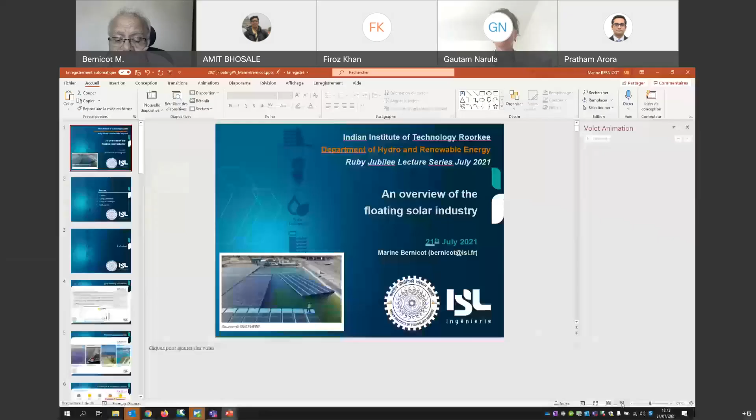So I am Marine Bernicot from France. I come from ISL Ingenierie, which is a French engineering firm which is about 35 years old. It was created originally by three experts coming from the dam and hydropower sector. You will notice from my presentation that our background is really dam and hydropower. We also work on any topics related to water and water resource management. So that's how we came to floating solar. And I am myself very much involved in seeing how we can have hydropower and dams work together with floating solar.

We are about 120 people based mostly in France, in 5 offices, and we work about half on French projects and half on foreign projects. Africa is one of our most active parts of the world abroad, but we also come sometimes to India, sometimes to Southeast Asia. It really depends on the projects. I think that's enough for my company.

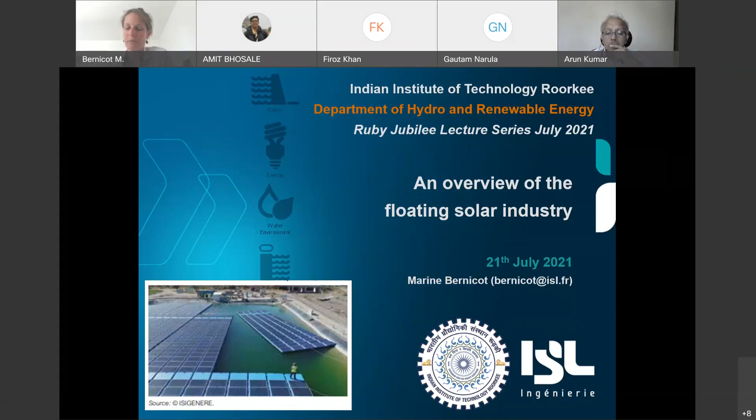Let's go directly towards the topic of today. So I'll try to provide you a brief overview of the floating solar industry, separated in 4 different topics: a bit of context and figures about the floating PV industry, then energy generation, design of floating PV and challenges encountered, and environmental and social aspects.

I'm just checking before going very fast into my presentation. Is it moving smoothly? We can see. We can hear you well. Okay, perfect. So I continue.

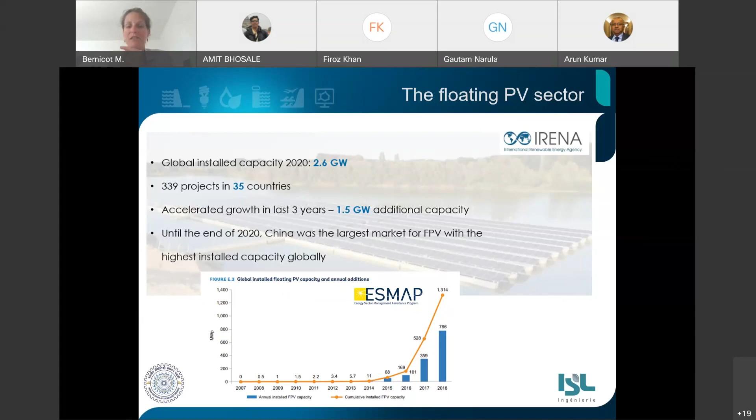Unfortunately, it only goes up to 2018, but you can see how fast the figures are growing, and the growth speed is still the same, even increasing now. Until the end of 2020, China was definitely the largest market for floating PV, with the highest installed capacity. A few examples of recent projects. Of course, there are many more, but I wanted to take some specific examples.

The first one is a 181 megawatt floating PV project located on the west coast of Taiwan. It's changing so fast, but I think it's the world's largest floating PV plant at the moment. It was commissioned in 2021, developed by China Energy.

It's very interesting to note that this project has been developed in a super densely populated area. The second project is located in China, in Anhui province. It was commissioned in 2019. It was the previous largest one, and it's operated by the Three Gorges Group, the company that also operates the Three Gorges Dam, hydropower dam.

The third project presented here is a project in the Netherlands, one of the countries in Europe developing the most floating PV at the moment. It was commissioned in 2020. The interesting thing about this project is that they really made a specific effort on monitoring and mitigating the environmental and social impacts by installing elevated modules to allow air circulation at the surface of the water, using glass solar panels to ensure the light still reaches the water,

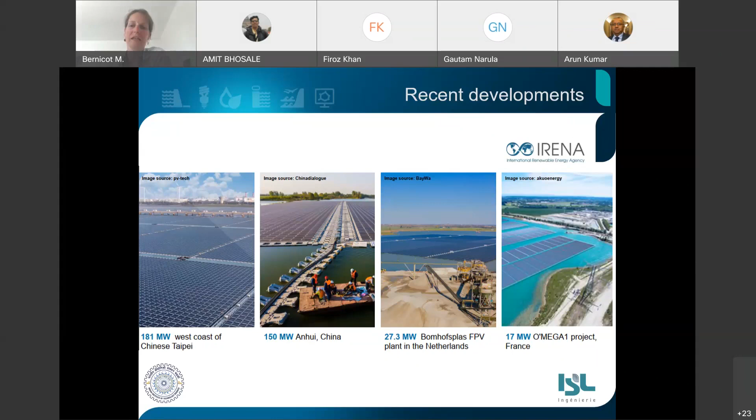Brief view of what's to come in the next 3 years. Many projects are in the pipes, about 150 megawatts in Indonesia. That project is one identified project on Cirata Dam. It's a dam reservoir developed by Masdar. About a gigawatt of projects in China, about a gigawatt of projects in India too.

I'm not going to go through India too much because I think Mr. Kumar will give a better view of what's happening in India at the moment on the floating PV sector. But yes, India is becoming a big player in this industry. South Korea is also having big ambitions in developing floating PV with 2 gigawatts planned in the next 3 years.

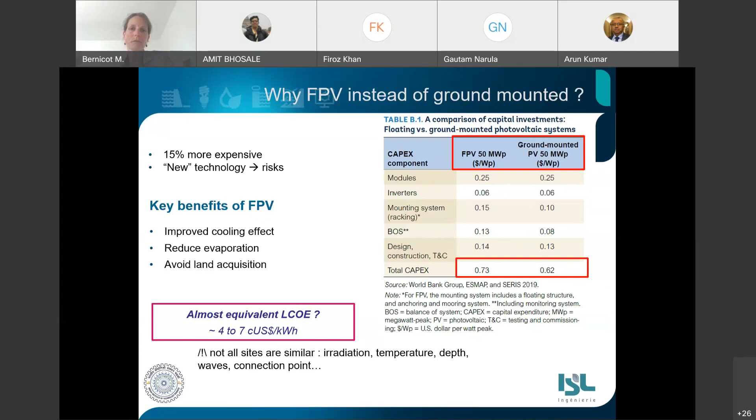About energy yield, I wanted to emphasize two examples showing comparisons that have been done on two different projects. The first one I wanted to talk about is Alto Rabagão in Portugal. This experimentation was conducted by EDP, the national energy producer. So it's a pilot project, 220 kilowatts, that was commissioned in 2016. And they compared the production of electricity between the floating plant on the lake and a PV plant on the rim next to the dam.

And what they observed is an efficiency gain of approximately 5%. They said that maybe it might be a bit less because measurement was from really high irradiance, winter, and unexpected temperature. But still, they observed that increase of 5% in the energy yield.

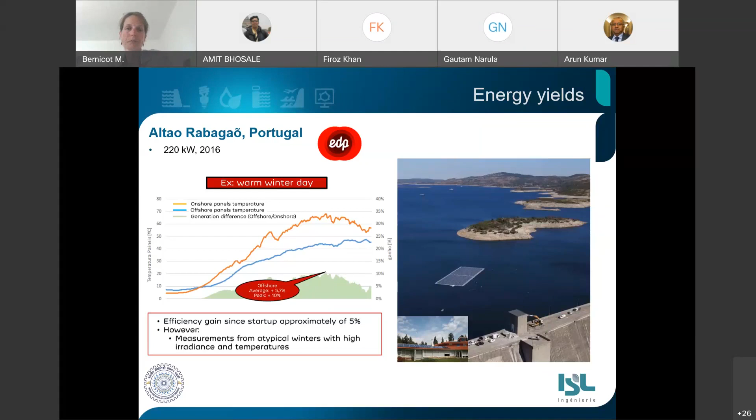The second example I wanted to talk about is not precisely a comparison between floating and terrestrial PV, but it's also an experimentation that has been conducted in Switzerland on Lac des Toules, which is an area really in the high mountains, and we would not really expect good results for PV projects. But I wanted to present it to you because I think in India you might also have this kind of location with a lot of snow and ice, and it could be interesting to know the technology.

So they compared here monofacial traditional panels with bifacial alpine panels, and they found out that with bifacial panels, thanks to the reflection of the light on the snow and in the area with the water and everything, they could increase by about 50% the yield and the energy production of the PV plant in the mountain compared to a traditional power plant in the plain.

The production they obtain in that power plant that is high in the mountain in the middle of the snowy area is equivalent to the one of a PV plant in North Algeria, in Africa, with a lot of sun. So it's quite impressive and really interesting to consider for PV in a mountainous area.

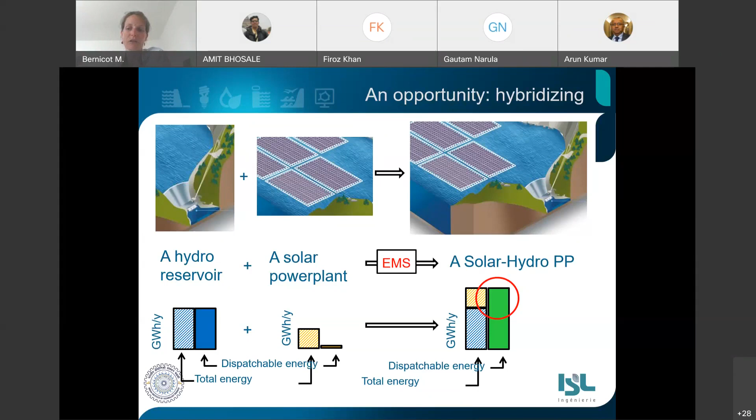The objective of hybridization is to take advantage of the storage capacity offered by the reservoir in order to transform this fatal PV production into a more dispatchable energy, and then help the integration of this new PV, which can be floating, into the grid. Several levels of hybridization are possible, from simple collocation to complete hybridized solar hydro, acting as a unique 100% dispatchable power plant. The complementarity can be on many time scales.

The minute one: a cloud is passing by, solar power is quickly dropping, creating instabilities on the grid, and hydro can, under certain conditions, locally compensate the drop by modulating the turbine flow. It should be done carefully, though, to cope with the turbine characteristics and avoid quick flow variation downstream.

The second one is the daily scale, to have the daily solar power curve match the daily electrical load curve. During daytime, the sun is up, turbines are functioning at minimum, allowing to store water, and then this water can be turbinated at night at peak hours. So you can shift water from day to night.

And the last time scale is the seasonal scale, where in many countries you have two very different seasons: a rainy one with less sun but with a lot of water filling up reservoirs, with a lot of hydro production, and then a dry season with a lot of sun but less and less hydro as the water levels are decreasing in the reservoirs.

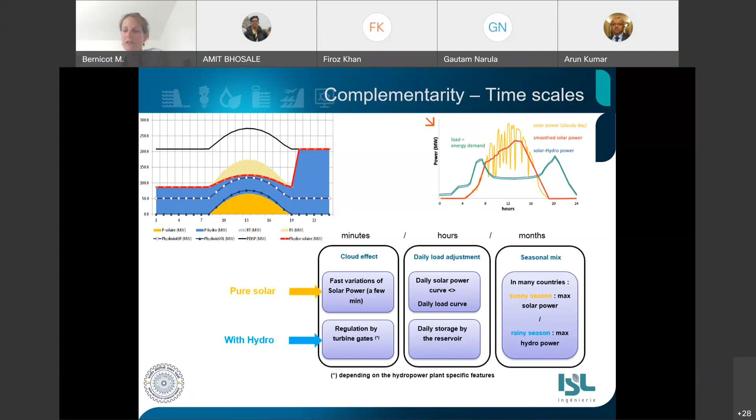Some interesting benefits can be obtained from this complementarity between solar and hydro. The first one is to increase the firm capacity by displacing water from daytime to peak time, that is most of the time at night, at evening time, let's say. The second one is to save water that you can replace by solar. And that water, in areas prone to water scarcity, can be used for other purposes such as irrigation, thus helping mitigate conflict around water, for example.

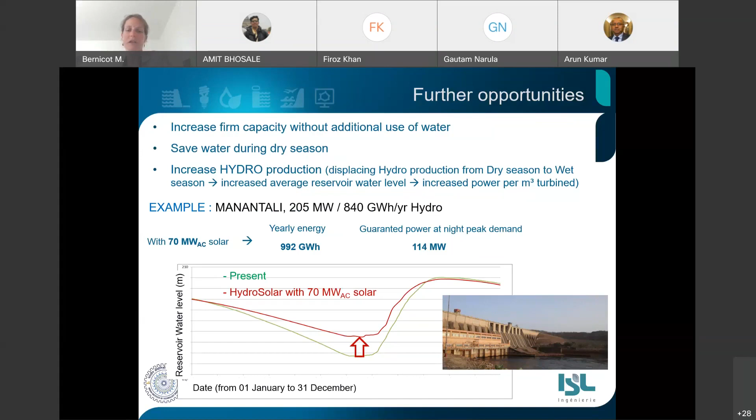And the third one is an induced benefit. By saving water, the average level is increased in the reservoir, increasing the head, thus the hydropower production. On the Manantali example in Mali, we managed to show that by optimizing the reservoir management curve, thanks to hybridization, they could produce up to 5% more hydropower with the same amount of water available. So that's quite a lot, actually.

So that concept of hybridization is attractive: increase of PV penetration on the grid, firm capacity, water saving, mutualization of electrical equipment, storage solution. But it also brings constraints, and it's not that easy, as always. You can have quick variation of downstream flow and associated environmental and social impacts, and hydro equipment fatigue because of repetitive stop and go.

It can also compete with other existing uses of the reservoir if not managed properly, or lead to loss of power by spilling over. It complexifies the operation, with a high level of communication required between hydro and PV. The right balance is not easy to find; probably that's why we don't see so many hybridized projects so far. But we start seeing first projects being implemented in Albania, in Europe, in China, and in Portugal on the Alqueva power plant.

Let's go to design and challenges. A short insight first of design choices and design technologies that exist for floating PV. The first one is the bank anchoring. So basically, you can have different types of anchors for different types of floating PV situation, different types of reservoir and everything. So the first one is you can anchor your floating PV on the bank. You have an example at the lower part of the image.

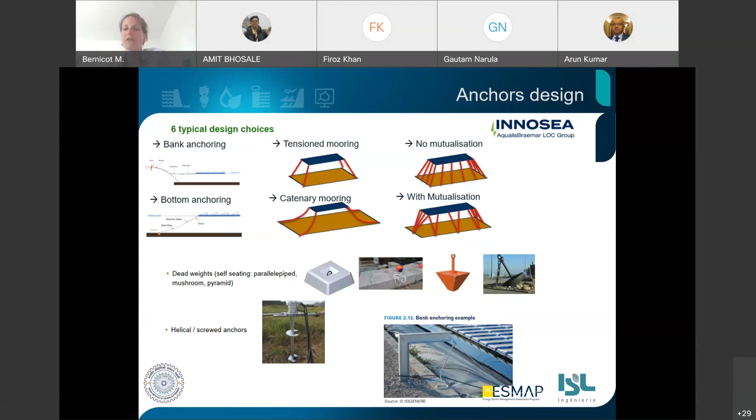And then you can mutualize those anchors in some specific points, or have many different anchors located one close to one other one. This mutualization depends on geotechnical conditions, of course, and also the type of floaters. And you will see that there's not only one type of floaters. Different floaters exist. We can basically sort them in three families.

The first one is individual floaters. I think the most famous one now is the one supplied by Ciel&Terre. So basically, each PV panel is located on its own floater, and then each floater is connected to the next one through connecting pin. Second family is what we call pontoonists.

So basically, on those technologies, the floating PV panels are located on a rigid, or at least a common structure that will handle the efforts coming from the anchors. So each panel is not set on an individual floater. The floater is carrying the whole structure in one block. And then we have a third family that is a bit in between, where you have floaters crossing each PV panel, and sharing efforts between each panel.

You have also some typical examples. This example down at the left bottom of the presentation is a floating PV plant that is rotating to follow the sun around a central pile. And that one is an example of the OceanSun technology, where the PV panels lay down on a whole structure that is floating on the reservoir.

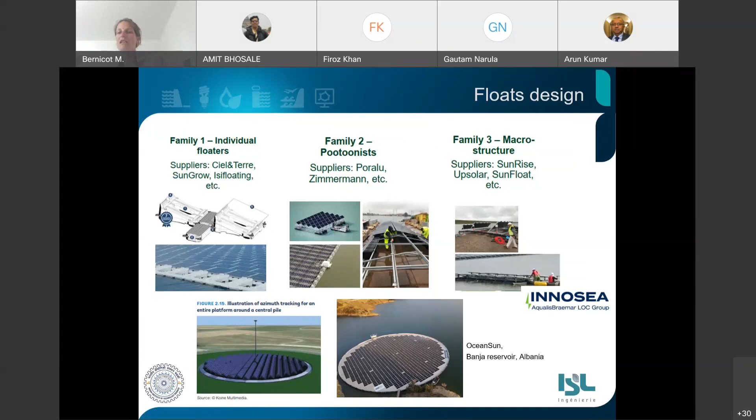So as you can see, there are many different technologies of floaters, and for each float technology, you will have a specific anchor design that needs to be designed together with the float technology, because you will not have the same anchors if you use the individual floaters technology, where the efforts need to go through every connecting pin, or if you need to connect and to anchor the whole pontoon of this family of floaters. So really the whole floats, anchors and mooring systems have to be designed together according to each site specification.

So those site specifications, what are they? They depend on soil conditions, the size of the area, the admissible loads on floaters, wind, water level variation, etc. Many data should be taken into account to propose the proper combination of floaters and mooring design and anchors.

I just want to give a small insight of additional challenges that are brought by floating PV on dam reservoirs, because you have specific topography around the reservoir, with most of the time a specific channel for the wind, which will increase the wind velocity and make it difficult to compute and to measure. You can also have higher waves because of the larger reservoir, and also stronger waves that will accelerate the fatigue on the floating PV structures.

Anchoring can also be more challenging because of deeper reservoirs and less known bathymetric and geotechnical conditions, and also because of higher water level variation in the reservoir that can imply specific design to be able to keep the tension in the cable and prevent the structure from drifting.

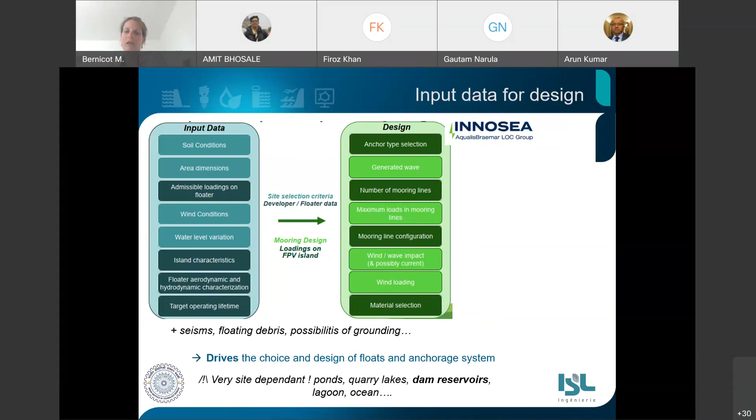So basically, floating PV are subject to some specific main loads: wind that applies directly on the PV panel, waves that will apply on the floating structures, and current that will also apply on the floating structures. Current, most of the time, is negligible, and so most of the efforts and the main loads will come from wind and waves. Waves are generated by wind, so basically the wind is the most important load that will apply on your floating PV system.

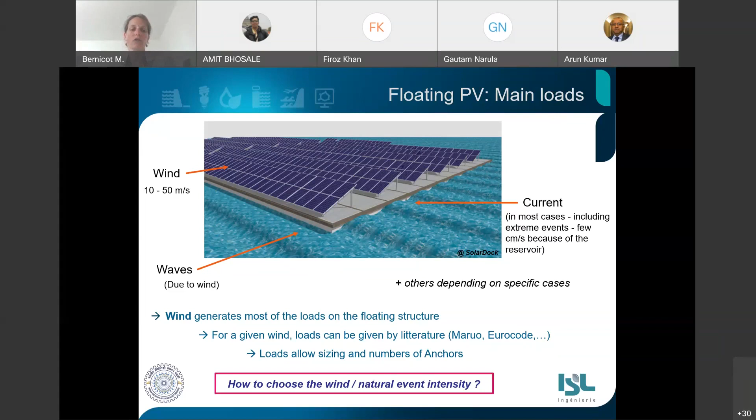For given wind, you can compute the loads that will be applied to the floating PV panels thanks to literature. But then how to choose the wind or another natural event that will create load on the structure, how to choose this intensity? You need to think about it from a risk analysis perspective.

In the case of floating PV on any water body with no dam, in case of failure, what happens? I only lose my investment. Electricity generation will stop, but it remains an investor risk over the lifetime of the floating PV plant. Typically, they will accept a probability of 10-2 and consider events with a return period of 50 to 100 years.

Second case, we are on a dam reservoir, and it's a bit different because in case of anchor or structure failure, you will also lose your production, but if the floating structure goes away, you can have obstruction of the spillway or create other damage on the dam that could eventually trigger the main safety barriers of the dam, potentially leading to dam failure.

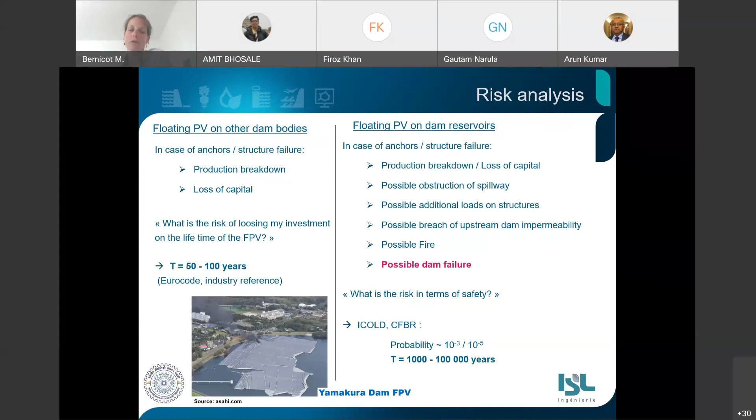In that case, the consequences of failure are completely different and much bigger. Dam safety standards impose protection against events with a return period of 1,000 to 100,000 years, depending on type and size of dam. So you see that we are not really on the same scale. Floating PV developers so far are not well aware of that difference, and they tend to consider dam reservoirs similar to any other water bodies, even though there is a difference in terms of consequences.

So what you must be careful of when you do floating PV on a dam reservoir is to meet the required safety criteria. You have two options for that. The first one is to reduce the floating PV failure probability. Option 2 is to disconnect floating PV safety requirements from dam safety requirements, and that's probably the wiser thing to do: add safety barriers in case the floating PV fails, to protect your dam and your spillway from any obstruction.

In the world, there's no formal regulation so far on this specific subject of floating PV and dam reservoirs. The best option will probably be, as always, a smart combination of everything, meaning reducing the floating PV failure probability, disconnecting floating PV safety requirements from dam safety requirements, and protecting your dam. That's the most important.

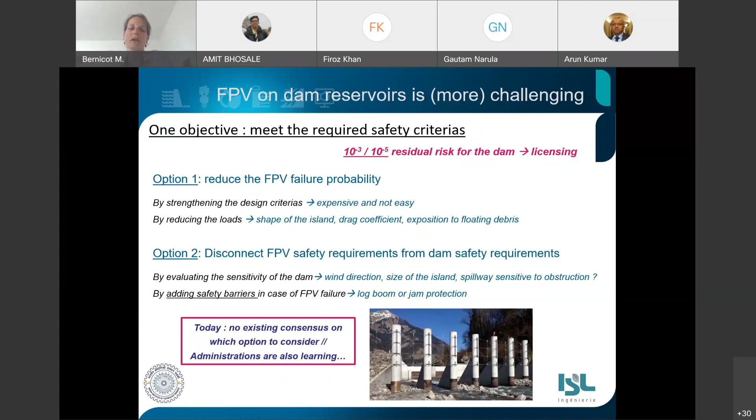Last point, environmental and social aspects. Three different topics will be discussed here. The first one is the physical environment, second is biological environment, and third is social environment. The first quite important impact expected from floating PV installed on a water body is that by installing the panels, you create a barrier so sun and wind cannot access the surface of the water as they used to in the initial configuration. That has an impact on stratification and water quality.

This graphic really synthesizes everything. Basically, your layer of oxygenation and the mixed layer depth become shallower, and the water temperature decreases below the floating PV as less light and less sun reach the water.

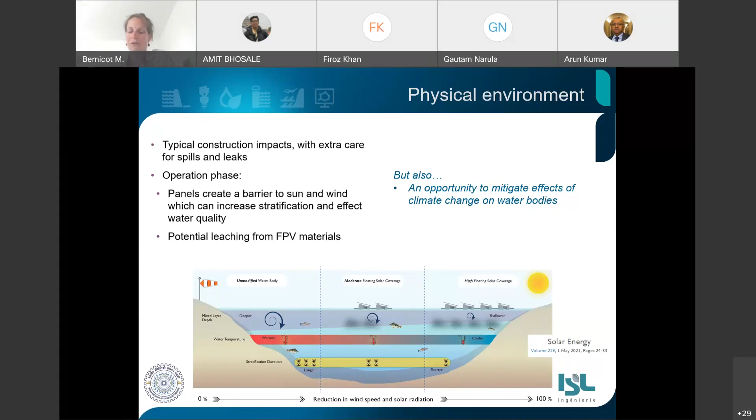This can be a negative impact, but in some configurations it can also be seen as an opportunity to mitigate the effects of climate change on water bodies, where with increased temperature you also increase the water temperature, which can have negative effects on the physical environment. So it's a balance. Floating PV panels can have a negative impact on water bodies, but they could also be used as an opportunity to mitigate those effects of increased temperature brought by climate change.

Second impacts are biological. The first ones are directly linked to that modification of the physical environment. When you have more shading, you have fewer plants at the bottom of the reservoir and more algae that will grow, so it will modify your environment. Water quality change, such as the thermal structure, can also impact biology, such as vegetal and animal species in the reservoir.

Another impact that is most of the time a good impact of floating PV on reservoirs is reduced evaporation, by reducing the action of sun plus wind on the reservoir. It reduces evaporation and saves water. In some situations, when a wide area of the reservoir is covered by floating PV, it can help reduce wind and current at the surface, thus reducing bank erosion and giving more space to local species and vegetation to grow and be less harmed by waves, for example. So this can be a benefit from PV panels.

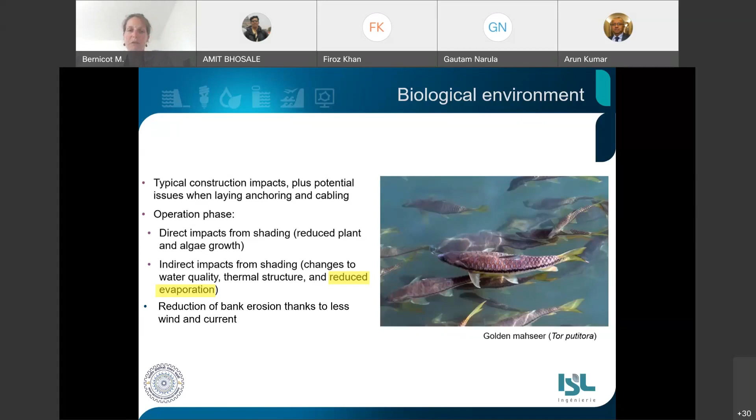Third impact is the social impacts.

Those are typical impacts that you can expect. When you install floating PV on a reservoir, you reduce the water navigation area, and you increase the risk of any elements, boat or anything, having a collision with your floating PV panel. You will change the visual appearance of the landscape. You will reduce the access to water bodies for fishing.

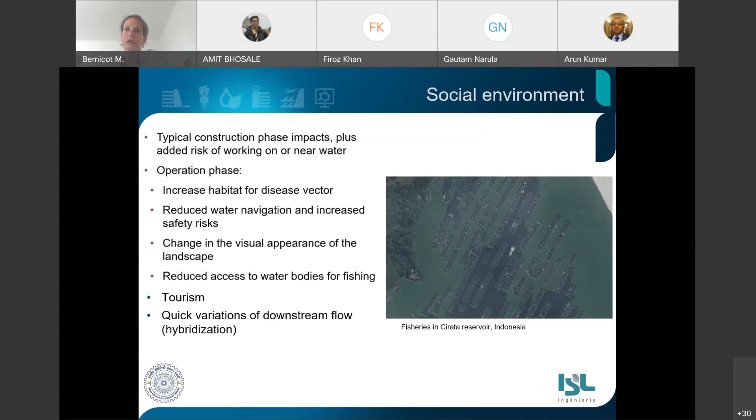The photo that I've put on the right part of the slide is an example of Cirata Reservoir in Indonesia, where they want to install 145 megawatts of floating PV. This reservoir is already used a lot for fishing, so this is a social impact that should not be neglected. You will have impact on tourism, and in the case of hybridization, you can also have quick variation of released downstream flow, downstream of the reservoir of the hydropower plant.

Those ones are quite positive impacts. Floating PV does not require any additional land. You use land that is not usable for any other purposes, so it reduces land use pressure. And we start seeing this already. The countries that are going the fastest towards floating are countries with a high density of population, and they need new space, and they cannot install ground-mounted PV because it will compete with other uses for the land.

It has low CO2 and greenhouse gas emissions, and when combined with hydro, through hybridization, it enhances those gains, meaning that for the same use of land, you will produce more energy than hydropower alone or PV alone. You will combine both hydro and PV on the same land use. So you decrease the global footprint when you relate it to the occupied surface, and it's the same with the greenhouse gas emissions. You will decrease it per kilowatt, related to the energy generation, because you make better use of the same amount of land.

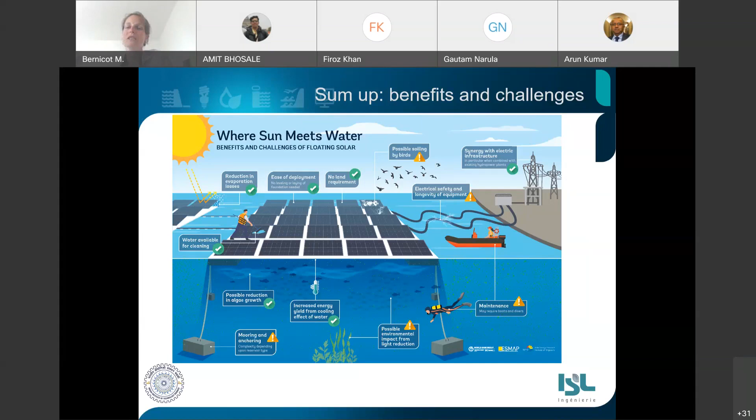I'm not going to take too long commenting on that image, but I thought it was important to put it back here. It's a really good summary that was prepared by ESMAP and SERIS in their overview of the floating PV industry. It summarizes everything that I've talked about until now: evaporation reduction, land requirements, challenges for technical design, increased energy from water cooling effects, impact on algae growth, and so on. It's a good synthesis, and it's good if you can have it with you if you are asking yourself questions about floating PV.

I'm done with the presentation. I just wanted to give you some very useful references if you want to dig into the subject. Those two documents, ESMAP, Where Sun Meets Water, prepared by SERIS and the World Bank, are very enlightening regarding the floating PV industry. One book published by Elsevier called Floating PV Plants collects many experiments and data that were conducted on floating PV. It's really interesting. The recommended practice written by DNV regarding floating PV anchor design, and some other articles.

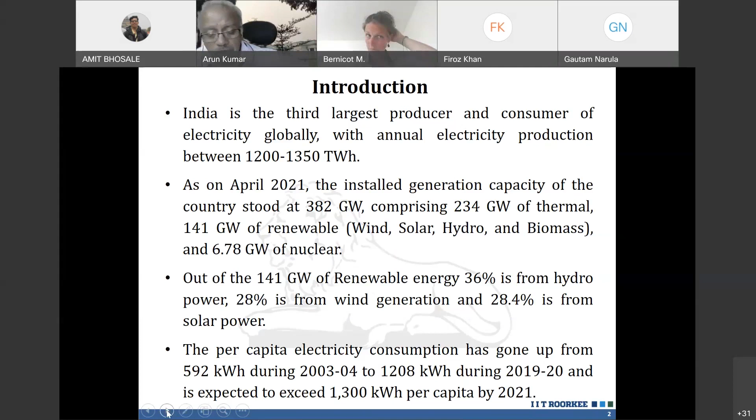India is the third largest producer and consumer of electricity globally, with annual production of say 1,200 to 1,350 terawatt-hours. We have about 382 gigawatt, where the majority still is thermal, and about 141 renewable, and out of that something about 36% is from hydro, and this 28% is growing quite rapidly. Expectations are going very high. Consumption is also rising by 6%. And the Indian commitment of transition from normal power to RE is going in a big way.

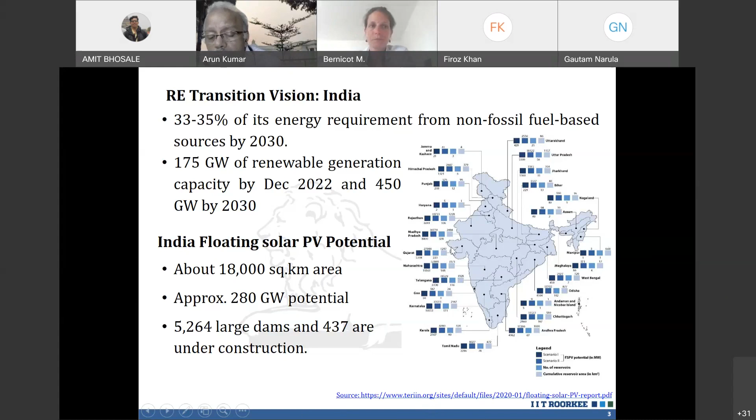So we have about 18,000 square kilometers of area and about 280 gigawatt potential. If you look at the map prepared under a study by TERI, the World Bank and others, you can see many states have a large potential for floating solar. They have also studied the variation during different seasons, because Indian water is quite non-uniform. We get rains during 2 months or 40 days, and we use it 365 days.

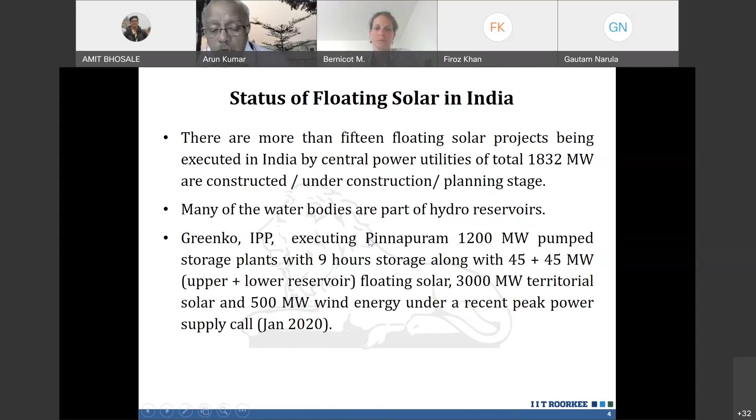So there are about 15 floating solar projects which have been already executed or are under pipeline, something about 1,830 megawatts, but many of them are part of hydro reservoirs. And one of the projects of Greenko, which is doing a round-the-clock kind of power commitment with 1,200 megawatts of pump storage, has got floating solar of about 45 megawatts on each reservoir, and then 3,000 megawatts on the land and 500 wind. So it's a very nice example of a very good hybrid project which is under construction, and since hydropower execution takes time, it's expected to be completed by 2023.

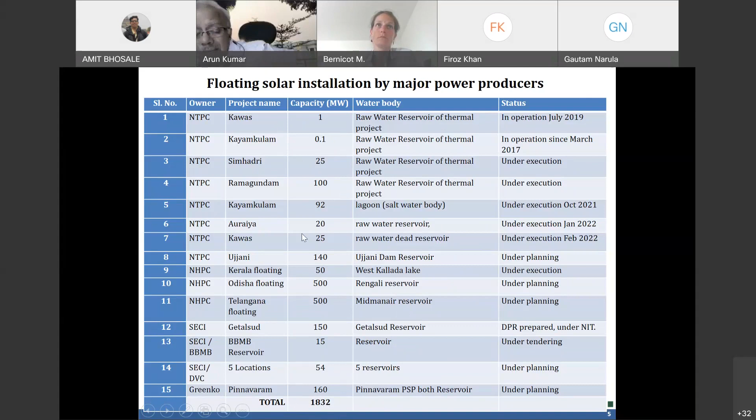This is a list which I have gathered along with my colleagues from the power companies. These are central power companies, NTPC by and large; you can see they started with 0.1, 1, 25, 500. So they're going from less than 1, into single digits, double digits, now triple digits. So many projects are going, and SPCs are going also. There are SECI and there are Greenko. So many projects are coming up, about 1,830 megawatts. But none of them in wastewater.

And I would like to support what Marine has said, that wastewater treatment is more complicated in terms of water quality, because it's acidic and all that, and there is a certain requirement of air and mixing. The waste stabilization pond also requires sunlight and air mixing. So I doubt very much that is going to happen. But since we have more opportunity on dams, water bodies, lakes, perhaps once that is finished, then we will go there.

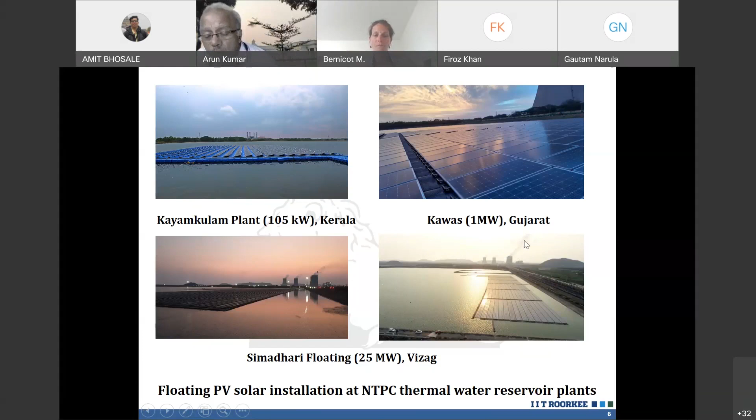So you can see these are some examples which have been commissioned very recently, and they are thermal power plants, so they have big reservoirs for their raw water requirement for cooling, etc. Some of the plants, like this one, are 100 megawatts and 92. So, like I said, it is in the beginning. If you see the list of projects, even up to 500 megawatt kind of power plants are under pipeline or under execution. They have recently tendered, but of course these are very large lakes.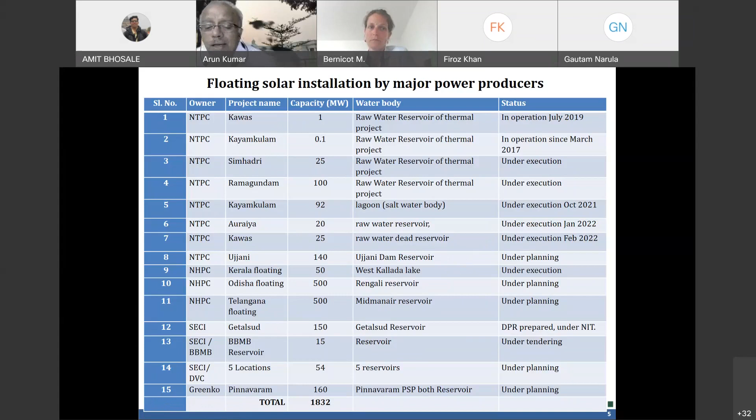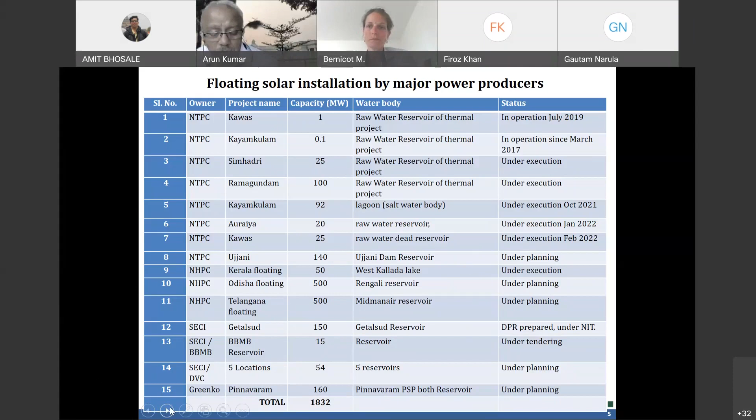And I also support that not more than 5% to 10% of the reservoir area should be covered with floating solar, because if you cover more, then obviously you are giving more problems to the aquatic life and other environmental issues. The reference which he has given also says 5% or maximum 10%, not more than that, though people have done more.

In terms of technical challenges, she has mentioned them very nicely. Not much historical evidence is available, so guidelines are not available. Safety requirements of electrical components are high since they are on water. Anchoring and mooring is a concern. There are a variety of types depending on site-specific water, geological and geotechnical conditions. You have to carry out a lot of surveys; bathymetry surveys many times are not available. Seasonal variations, quantum of trash, especially our Himalayan belt has a lot of trash and sediment. So that is also a big issue.

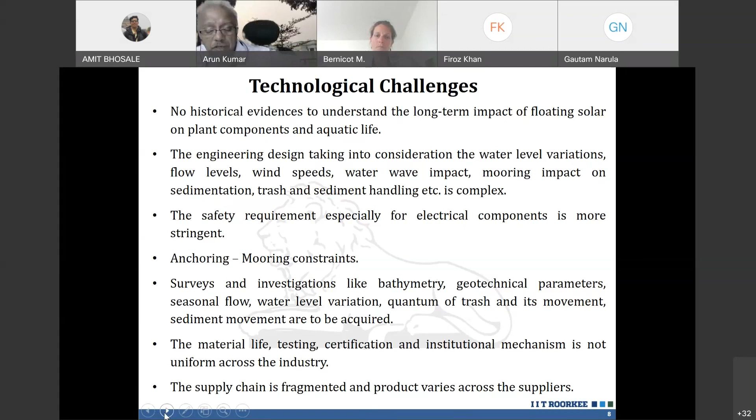Material life testing, certification, institutional mechanisms, since most of them are government, and anybody would like to see their product life go a long way. The supply chain is not very established, so when you have spot orders, your supply chain does not give you optimum or cheaper cost. But people believe that in the next 3-4 years, the cost of floating solar will be at par with land-based solar. This is what many experts believe, once the supply chain is properly integrated. Then there are regulatory challenges in terms of failure of anchors.

She has said very well that the design, installation, and floating operator may conflict sometimes with dam owners. Various electrical components and safety requirements are very high. Components like floating platforms, cables, etc. face biofouling, corrosion, degradation. So there is a lot of initial hesitancy by dam owners to allow floating solar, because they take a lot of time.

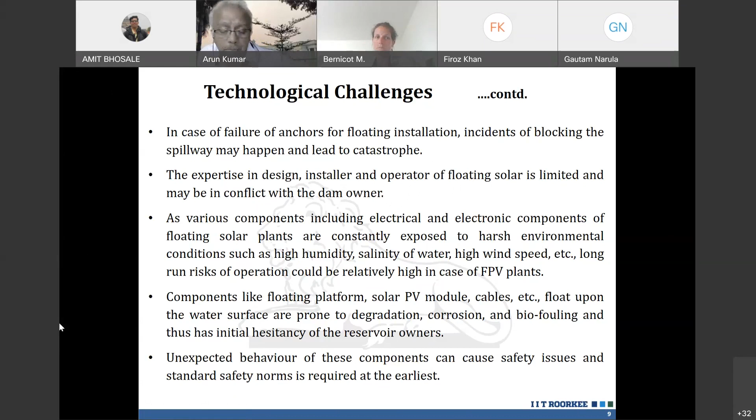Unexpected behavior of this component can cause safety issues, the blocking in spillways. There are regulatory challenges because in India, and not only in India, there may be many places where the dam owners are water supply people, irrigation people, fisheries, drinking water, water resources. So it is very time consuming if you want to do it, because with land, everybody knows the land belongs to party A.

But in water, many times there are multiple users, multiple stakeholders, and getting a clearance from everybody takes a lot of time. There is no standard agreement available for water rights. So there are policy requirements, regulatory requirements; standard technical specifications for materials, floats, etc. are not available. Supply chain, including manufacturing, that's why some kind of regulations should be available. Preparation of the reports also takes time. You require experts because everybody is not an expert in the area.

And floating is going to increase in future because off-river PSP schemes may come up. There are many non-traditional sites that may come up. Experience sharing of floating solar, I think, is the one which regulators should bring out. There are policy administration issues; we should have single window clearances, because if you go to more than 20 windows to get a project cleared, then it's quite difficult. The state government needs to have some special task force to clear the projects. There should be some database available.

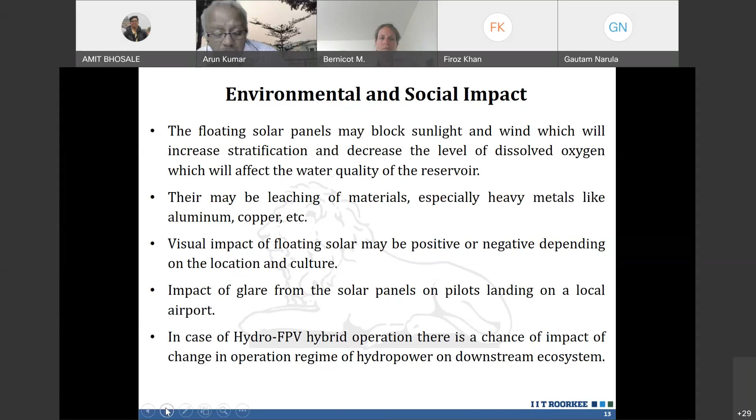And I would like to say we should take it with a pinch of salt also, because nothing comes free. You cannot expect anything without some impact, but you have to see what the impacts are; if they are major impacts, then we should not do it. If there are minor impacts for that region, she has said that we should go for lesser coverage. So 10%, 5% is considered not to give much impact. There may be impact on local bird population.

There could be some environmental impact during the construction stage. There could be impact on aquatic life due to shading. Some pontoon water pockets may form. There may be some leakage of lubricants and chemicals, which may happen a little bit. There may also be conflict with leisure activities like water sports and other things. And then there could be some mitigation measures. You can give more spacing between panels so that sunlight can reach the water and we reduce shading.

The impact on water quality depends on water retention time, with constant monitoring of changes in the microbiology, algae, and local bird populations. One of the points recently discussed in the hydrosolar conference is that a high copper level directly below the solar panel may suppress the growth of algae, so algal formation can be stopped. Not many details are available, but people are working very hard on this as new technology comes up, and also to reduce impact on the downstream ecosystem so that hybrid operation is not negative.

And like we also mentioned, the investment climate is very conducive in India for renewable energy, solar and wind. And FPV systems can contribute to reduced water evaporation so that one can make a trade, like if I'm saving your water, why don't you give me some money? So that may happen. Still, FPV is considered risky because of certain uncertainties. The World Bank recently supported SECI, the Solar Energy Corporation of India, in leveraging international knowledge and best practices.

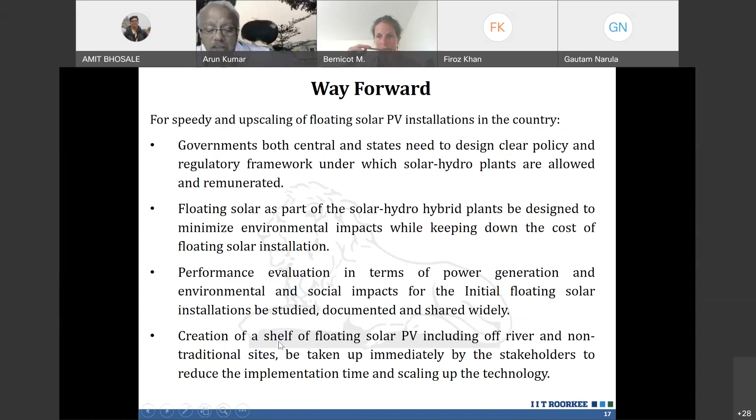Performance evaluation in terms of power generation, if it is enhancing the power by a certain level, and if it is giving a negative impact of anything, they should be studied, evaluated, and shared, so that when people decide about this floating solar, it is a well-considered decision. And also one should take up creation of floating solar, including off river and other sites.

I acknowledge, not only my institution, because I get a lot of input from NTPC, NHPC, and SECI, and one specialist, Surabhi, from the World Bank. In fact, I presented more or less the same paper during the last 2 days' international conference of solar and hydro. So with this, I'd like to say thank you.